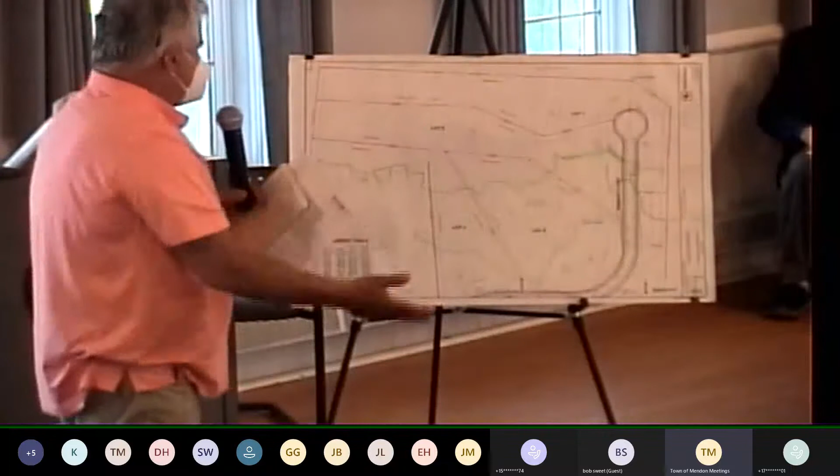This first plan shows a conventional subdivision. It shows Lot 1 being cut out as an ANR plan, and then it shows the remainder lots all meeting the required frontage and area for a conventional subdivision. The road comes in, swings to the east, and then heads back north. And we show that we can get a total of 7 new lots on the subdivision road and 1 lot, which is an ANR lot on Hartford Ave. So we get a total of 8 conventional lots.

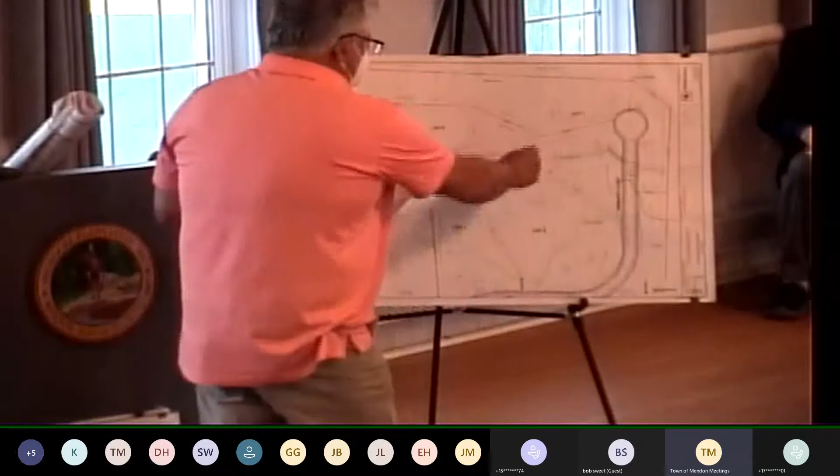Once we show that we can get 8 conventional lots with the proper frontage and areas, all the upland areas meet regardless of the wetlands, then we can move forward and we can ask the board to approve an open space subdivision. So up to this point, we came in front of the board with a pre-submittal plan, to see if they had any comments about it.

The board had a few comments, we adjusted the plans, and then we came in at the last meeting with our submittal package. We presented the submittal package to the board at that time, and they set the public hearing for tonight. I'm going to go through all the plans with you.

These are preliminary plans. We show drainage in a general sense. Nothing's final. Last meeting, the day after the meeting, I submitted a package to Jeffrey Walsh of Graves Engineering. He's the town consulting engineer. After 2 weeks, he got a letter back to the board with some comments about the design.

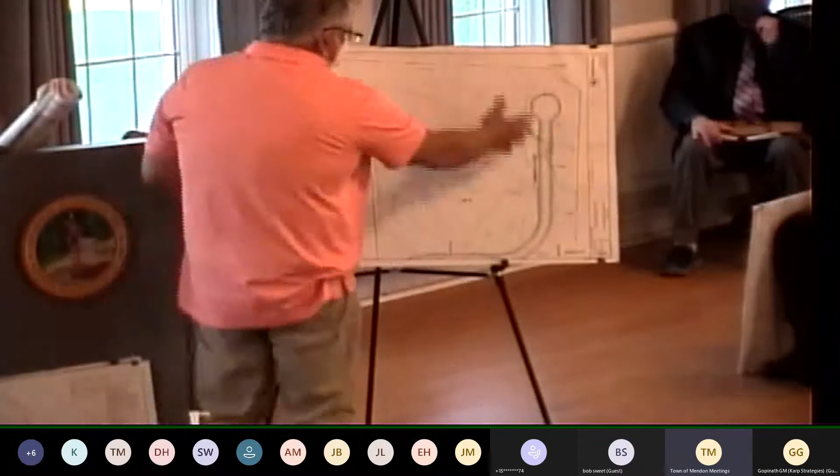And we have addressed those comments. We've sent him a new set of plans. I have his letter, I'm going to go through those comments tonight also. So I just wanted to go through... so this was the subdivision to the conventional plan. If anybody has any questions about that, I'd be happy to answer them.

Sure, good question, I'm sure you're gonna answer. The entrance going in here, is that the current entrance to get to those 2 new houses? Yeah, so the rehabbed house, yeah, it's going to be the same entrance.

There'll be a wetland crossing there with walls. There'll be a right-of-way of a road there, the road, walk and everything. That's just a driveway now to get to the houses. When we did cut out the existing house to get to it, they will be part of a homeowners association. When it's done, this road will not be in town. It's going to be a private road.

They'll have the 8 lot association for upkeep of the road, plowing, etc. When we do submit the definitive, we'll have the homeowners association all ironed out. It'll be submitted with the definitive package.

Also, some of these lots are duplex lots. Some of them will be single family. The houses that are going to be duplex lots will have a condo association set up for each individual lot. If there are 2 units on 1 lot, each unit will pay a share of the homeowners association. So it's fair to anyone that builds a single family up there.

Any other? Are you doing a lot right now, and you're making it where people will buy a lot and build whatever they want on it, or is it going to be houses? Oh, it's going to be houses. It's either going to be a single family or a duplex lot.

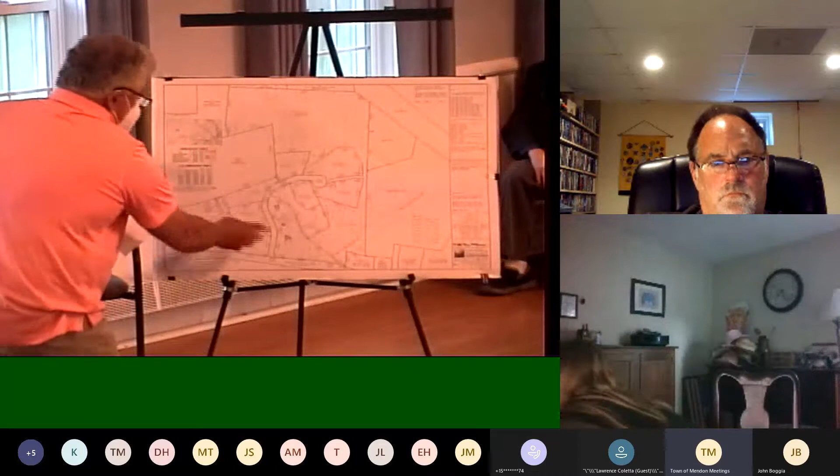If you guys want to take a look, this is the actual lot configuration at 80 scale of the whole subdivision. You can see the road with the lots, and this is open space A, and this is open space parcel B.

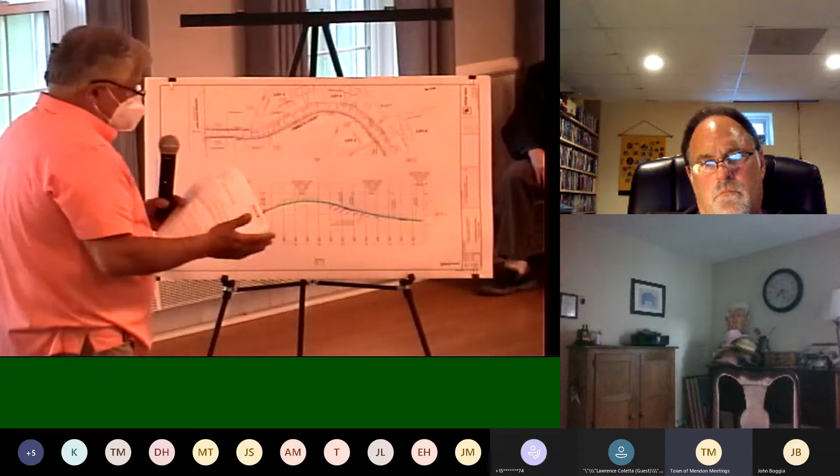So another benefit of open space subdivisions is it gives the board some leeway to grant waivers on some items regarding the design of the streets. It lets them waive some of the slopes. It lets them waive mostly like slopes of the road, the curves in the road, how long the curves are. So what it does, it lets you design the road to more of the contours that are existing on the site. So you're not doing big cuts and big fills. You're not blasting 15-foot cuts in order to reduce your crest over a hill. You might only have to do 2 or 4 feet to get a crest.

So we've designed the profile. We originally designed it with a crest with a K value. The K value is kind of the steepness of the curve, how fast the curve goes up and then comes back down. One of Jeff Walsh's comments was that he would like to see that over a K value of 19. When we submitted it was a 7.5. We have made that change. We're now at 19.47. It stretches that curve out.

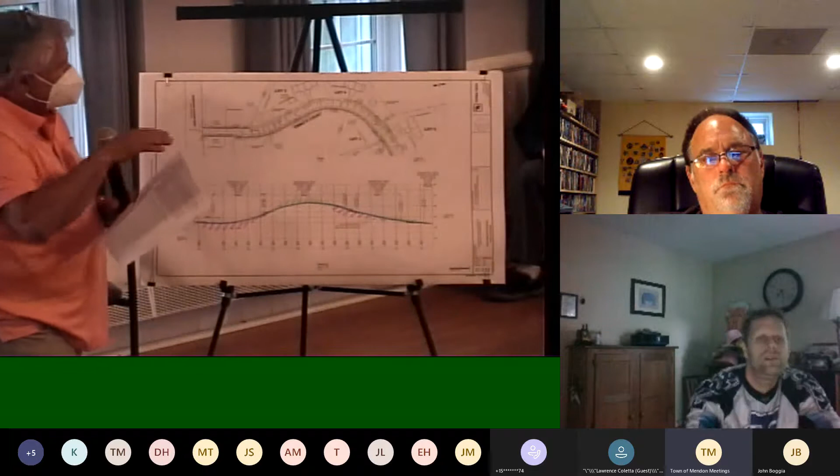If anybody can see this plan, the blue line represents the profile of the road. The pink areas represent fills and the green areas represent cuts. You can see they're fairly balanced. There's not huge fills and there's not huge cuts. Probably the biggest fill in the subdivision, of course, is the wetland crossing at the entrance of the driveway. We came off Hartford Ave at a 2% slope, and we'll do that wetland crossing. That's going to give us about a 6 to 8 foot fill over what's existing there. So we'll have to do walls on both sides of that.

An additional comment that Jeff Walsh had was he would like to see the walls outside of the right-of-way, which means he would like that whole right-of-way there 50 feet wide. We're asking the board not to make us do that because we know that conservation is going to want that as tight as possible, so you fill as little wetlands as possible. We have come back. We're going to show a 2-foot grass strip and then the sidewalk, and then another grass strip and the wall, and on the other side, a 2 or 4-foot grass strip, then the wall. That will still keep the walls inside of the right-of-way.

It'll widen it more than our initial submittal, but it'll make it doable that we're not doing a whole 50-foot swath across the wetland. That's the idea of an open space. You're trying to fill and disturb as little wetlands as possible. We feel it's adequate. The fire department felt, I believe, it was adequate. He saw the plans. He had no comment about that. I think Jeff's comment about getting them out of the right-of-way is because he didn't want the town to be responsible for the upkeep of the walls. But in this case, the road's not getting turned over to the town. It's a private road, and any maintenance to the walls will fall in the homeowners association agreement and will be the responsibility of the homeowners in the property, not the town.

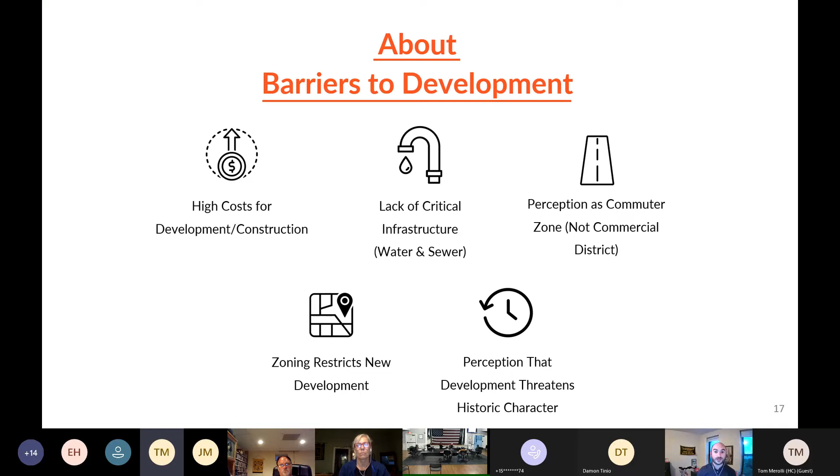We've heard that there have historically been some challenges around what's allowed and unallowed in zoning. Indications are that that's gotten better over the years, but there's still maybe some lingering things that we're hearing about. And this is true across the number of communities that we're working with. We're doing the same project with Upton and Grafton as well, and I'm hearing the exact same thing there. There's the concern that development at any scale can threaten the historic character or the rural nature of the area. And that's something that we would want to be cognizant of.

I literally looked at him and I go, yeah, that's kind of exactly what I'm trying to do, actually.

So some ideas that we've heard so far: create formal connections between the town and businesses, make sure that there are clear lines of communication, promotional programs for local businesses. Your neighbors in Grafton have had a lot of success with that. Facade improvements that help align existing businesses with the new design guidelines that have been approved. On the municipal capacity side, it could look like building connections between the different committees and boards that exist, so that you're coming together more often and can collaborate more frequently. Creating a marketing plan for the town-owned parcels, so that when you re-put out the RFP, you get more traction, get more attention from developers, put it on more radars.

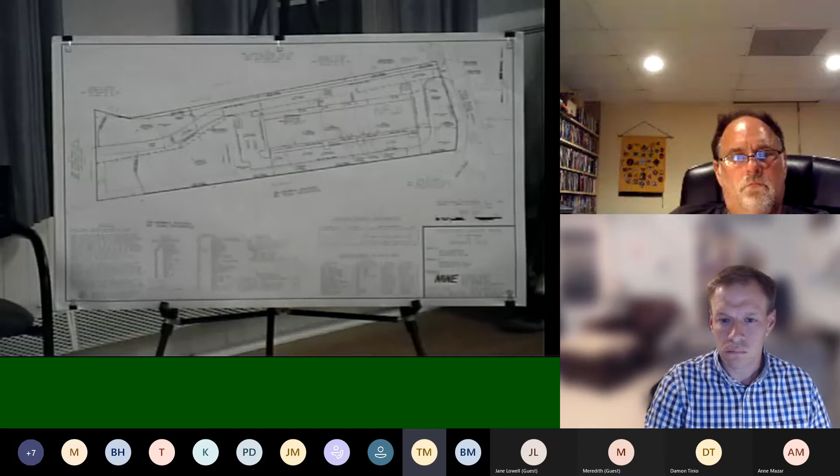Certainly there's more opportunity for planting on the southerly side of the driveway that runs to the south side of the building, being kind of that customer interface part of the building. So again, as Fran had mentioned, that strip between the parking and the boundary could certainly be bermed and planted. And I do just want to remind everybody that the proposed building has a height of just over 18 feet, so it's not a high-profile building.

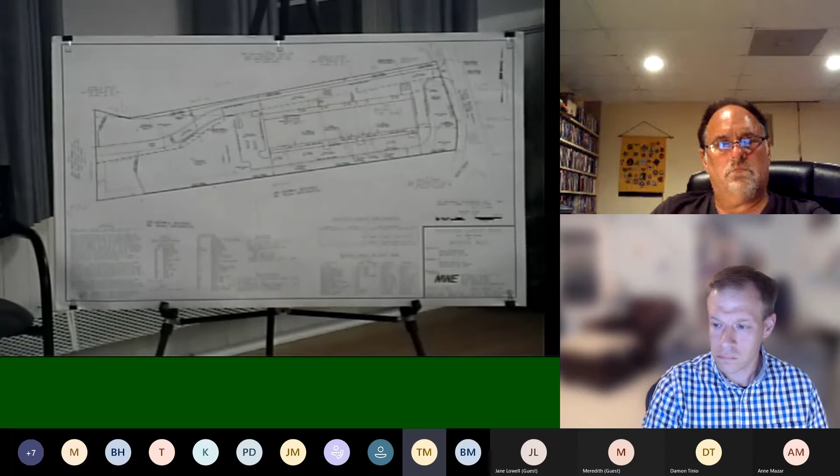So I do think that a berm and screening could certainly be effective in blocking that view from abutters on Bates Road and Edward Road. We could do the berm and the extra plantings either way. That doesn't impact it. The minute we start moving the building, we get into stormwater management, the whole process again, and that's a big deal. We're not talking about small dollars. It's still expensive to do what we did, but redoing the stormwater management system is quite large. So that's where we're at.

Okay, so in fact, you'd be willing to slide the building over 15 feet is what you're telling us? If we got the abutters on board to accept the project. Well, I can't speak for the abutters. This information is for me to share with my board. I did a bunch of research on these types of situations. The bylaw as it's written is extremely ambiguous. I'm having a hard time coping with the fact that we've created a bylaw that says we have to be 200 feet from a home,

but you have to maintain natural vegetation. Well, we all know that if the building has to be offset 200 feet, emergency equipment has to be able to circle the building. So that in itself is an ambiguous part of the bylaw. There would have to be some type of road structure back there. So it doesn't make sense that we would make a bylaw that, going back to previous comments, the situation was, it's kind of like... I lost my thought here for a second, but I'll get back to it. I'm going to jump on to something else.